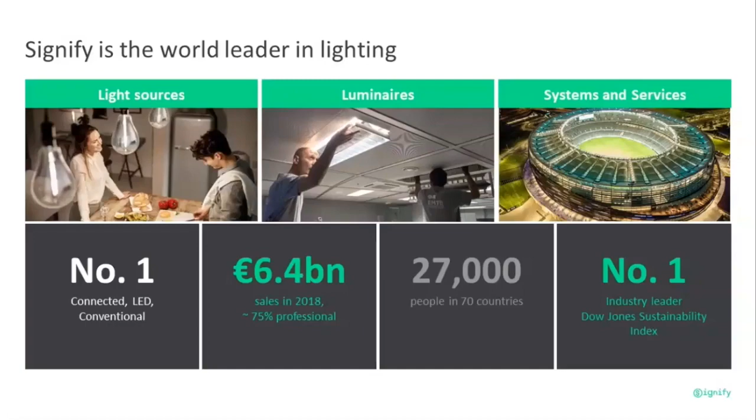Color Kinetics for architectural lighting, used in lighting many of the world's landmarks, for example, the Empire State Building, Bay Bridge, London Eye, 15 London bridges in the Illuminated River project, Gateway of India, and the pyramids. Vari-Lite and Strand entertainment lighting. These products are used in theatres and by artists big and small, including Iron Maiden, AC/DC, and Kiss, to name but a few.

So now let's look at our optical portfolio, Legend Optimise, or Legend O as we like to call it. Legend O was developed and launched back in 2017, but has continued to grow and been adapted based on our customer needs. It provides a complete range of optics covering all public lighting applications, outstanding and flexible performance, LED optic engines, a future-proof distribution, standard and customised flux and optics solutions.

So Legend O offers a unique combination of standardisation and customisation. It provides a standard LED engine available across a multitude of luminaires and allows us to provide tailor-made solutions to meet the customer needs. Legend O offers complete optics, so a range fit for any application. It's flexible, allowing standardization over applications with outstanding performance across a wide range of geometries, as well as design parameters, for example, tilt and overhang.

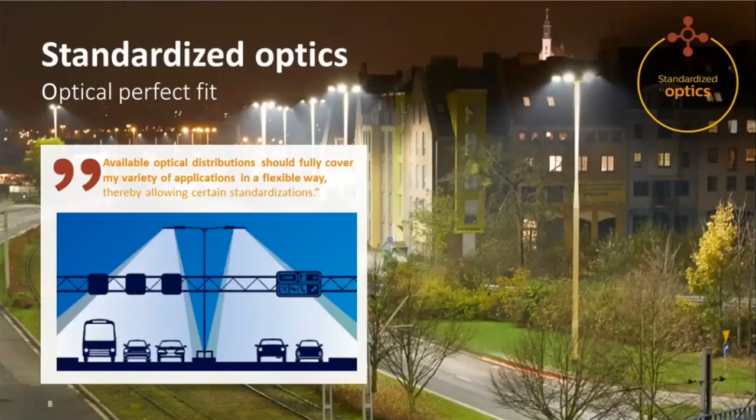So let's look at some of the optical distributions available in the portfolio. Legend O offers a variety of lighting distributions to fit different lighting configurations, depending on the application, the user, the lighting criteria, so the level of comfort, maybe the glare classification and TI, the geometry of the area to be lit, and the beam width.

Within this wide optical portfolio, there is a compact optic selection available. So if the preference is to limit the variety, i.e. to simplify asset management and operations or maintenance, then we use the compact optical portfolio. If you have a look at the blue ones, designed with luminance in mind, so our M classifications, and the green colour with illuminance in mind, so for our P classifications or C classifications.

Distributions are designed for major and minor roads, for small to large streets, for motorised or mixed traffic, pedestrian streets and paths, parking, squares, parks and roundabouts. They can provide high spacings and minimum energy consumption for renovated or new lighting designs. They can be used in various overhangs and luminaire tilt angle positions.

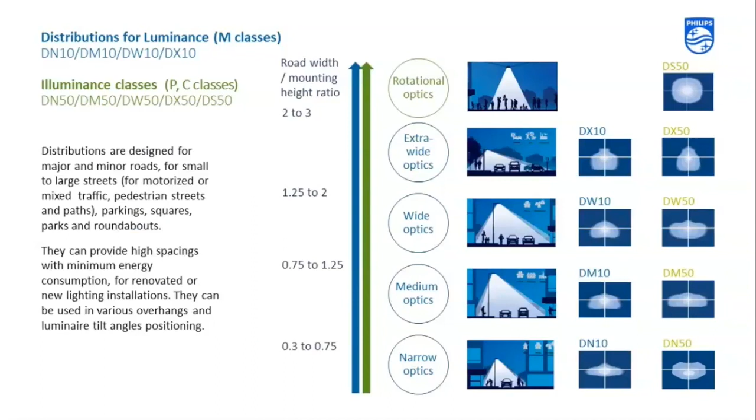With this diverse optical portfolio, Legend O opens up the option to optimize the lighting solution according to well-defined and/or project-specific criteria regarding quality, local lighting requirements, matching specific application needs, thereby often improving energy profiles. So these include the full range of Legend O. In the UK, we offer all of these optics in our portfolio and they are already in lighting reality.

Again, the blue ones are designed with luminance in mind, so these are for our M class and our traffic routes. And the green colour is with illuminance in mind, so these are for our P and C classes. This additional flexibility really provides the designer with the option to pick the most energy efficient optic for the exact road geometry and application. Sometimes there's a need for more specific optics, including things like wet roads or a higher level of comfort, so a higher G class, with optics available from G1 to G6.

Facial recognition, light trespass prevention, so internal louvers with photometric data, catenary implantation, night preservation, protecting the night sky, and biodiversity preservation, protecting our wildlife. In the UK, we probably look at the comfort versions and backlight versions the most. So it's important to note that the higher the G class in general, you get a reduction in spacing and increase in energy consumption due to the level of comfort of the distribution.

So if you're comparing luminaires with no G rating to a luminaire with a G3 rating, for example, then although the comfort level for the user will be better, the energy consumption may increase. So it's important to remember the driver here and specify if a glare classification is required.

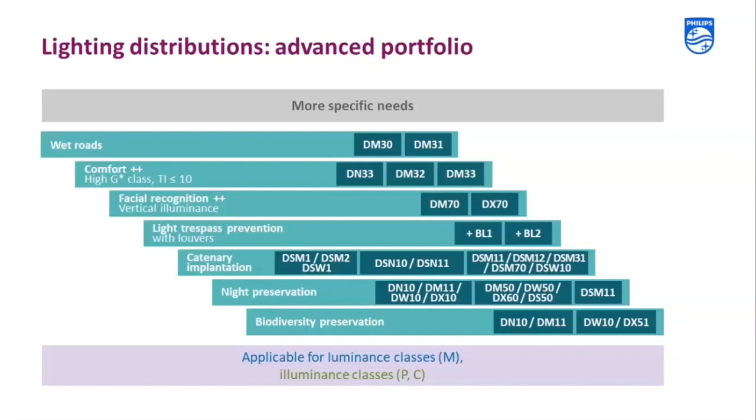We also have some other dedicated areas. So for example, we have a symmetrical optic. This is the DS50. This produces a symmetrical pattern of light in a road lantern. It's good for things like heads of cul-de-sacs, car park areas, squares and parks. We have specific pedestrian crossing optics. So these are dedicated to light pedestrian crossings and give the positive contrast required.

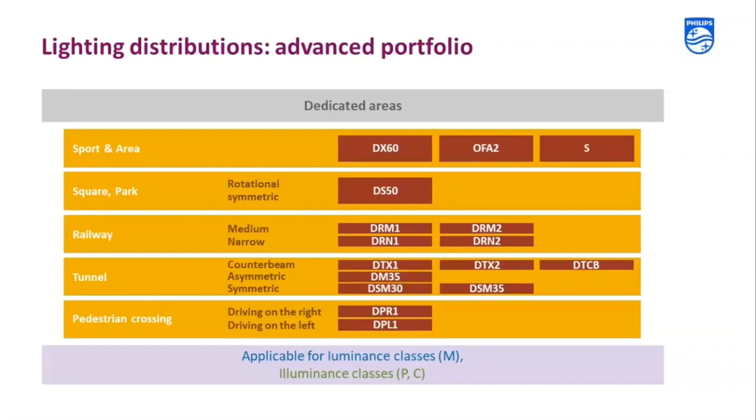I'll just mention the railway optics. So these have been designed for platforms, but they're very efficient on footpaths at around 30 to 35 metre spacings. So we have optical distributions that have been designed for luminance classes, so for our M classes. So there's some examples on the slide here. So we have things from extra wide, so a DX is an extra wide optic, a DW is a wide optic, DM is your medium optics, DN is your narrow, and we also have some extra narrow optics.

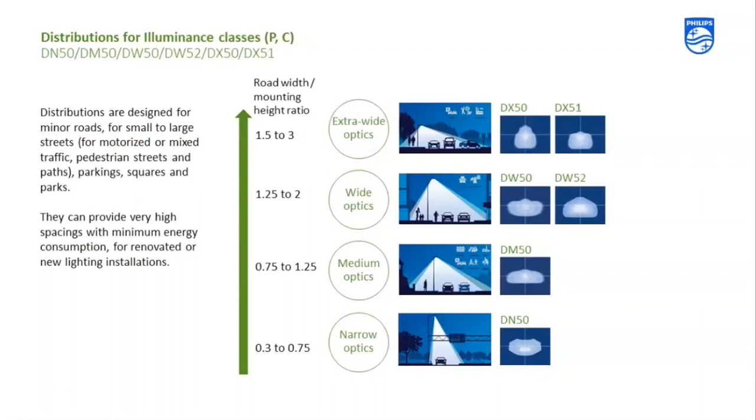And we have the same for our illuminance classes. So for our P and C classes, again, we have extra wide optics down to narrow optics as seen on the slide. So these optical distributions have been designed for specific needs. So wet roads we don't really use in the UK, but we have a wet road optic if required. Comfort, so the DN33, DM32 and DM33 give a higher G rating, so G4 or G6, for motorway applications, for example. The DM70 and the DX70 are designed for facial recognition.

You need to be a bit careful with these. If you don't want facial recognition, if it's not part of your design, then they're a really good optic for many applications, but the energy efficiency is poor. So they'll cover a lot of applications, but they'll use a lot more lumen to do so.

Light trespass prevention, so these provide us with internal louvers with photometric data, so you can model the impact. So we have BL1, which is a limited cutoff, and BL2, which is a very sharp cutoff at the back. However, we can also provide external louvers for most luminaires for customers who wish to see a louver fitted.

Here are some more distributions for dedicated areas. So again, the most popular are the symmetrical optic, so the DS50, and also, as we mentioned, the railway ones are sometimes very good on footpaths. And then we have our pedestrian crossing optic, so we have the right hand side and the left hand side, and we also have specific optics for tunnels and subways.

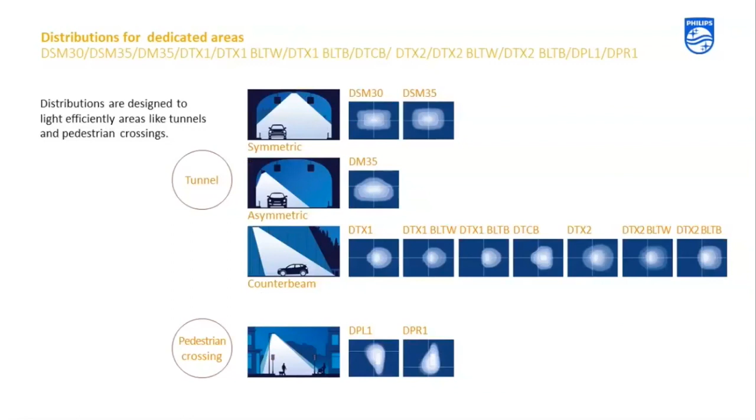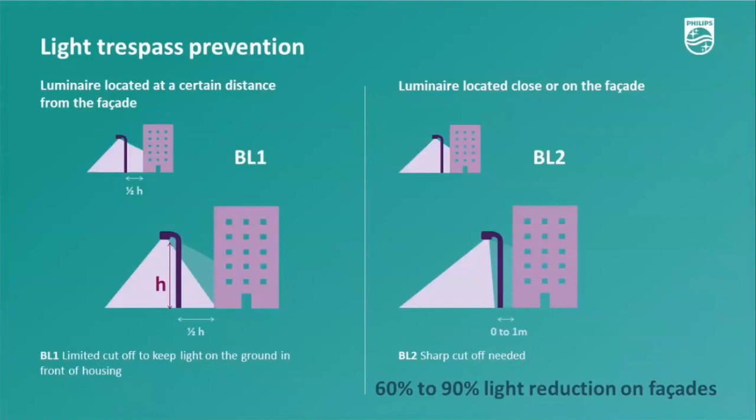So we mentioned light trespass prevention, and we're looking at the optical distributions. So they provide greatly reduced light trespass. It's an internal louver that fits into the luminaire. It can be used for retrofit solutions. We have photometry for the calculation, and it also preserves the aesthetic of the luminaire because you can't see it from the outside. And we have a BL1, so that's a limited cutoff, and we have a BL2, which is a sharp cutoff. And using the internal louvers can give a 60 to 90% light reduction on the facade.

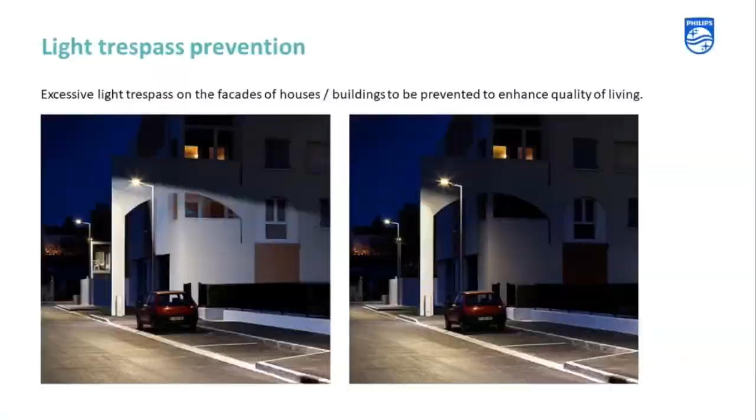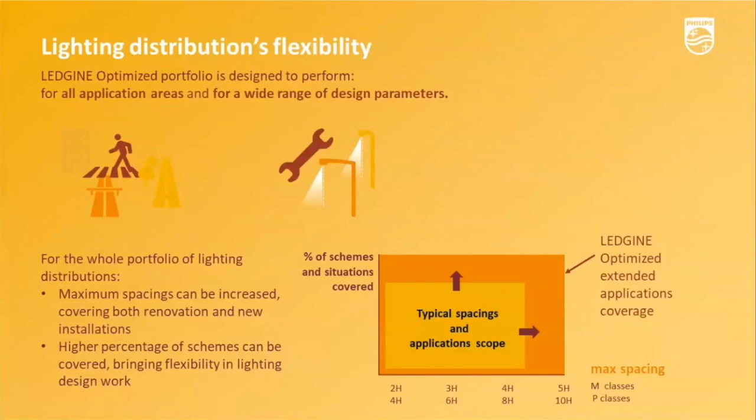So the beauty of LEDGINE Optimized is now it's in the full range of products. So you can use the same optical distribution in a road and street luminaire or an architectural fitting or a floodlight, giving you flexibility to use the correct lighting distribution and product for the application. It also allows the LED to be upgraded easily using the same optical portfolio to keep up with LED advancements.

So we've covered the optical portfolio. It's important now to know how this data is presented. So now we're going to look at the difference between absolute and relative photometry.

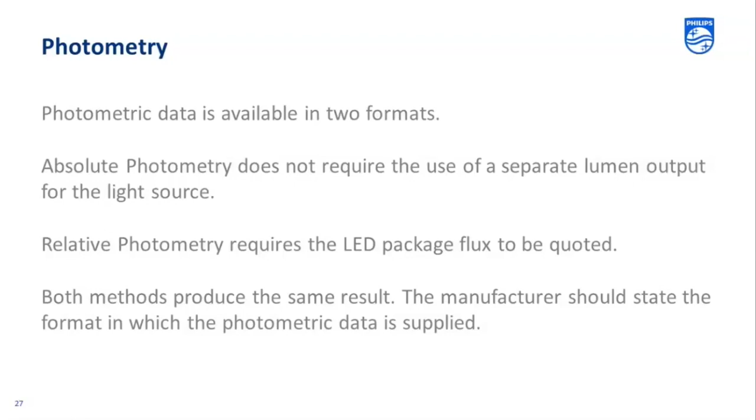So photometric data is available in two formats. We have absolute photometry, which does not require the use of separate lumen output for the light source, and relative photometry, which requires the LED package flux to be quoted. Both methods produce the same result. The manufacturer should state the format in which the photometric data is supplied.

So absolute photometry for the LED luminaires should be conducted according to the IES LM-79-08, photometric measurements of solid state lighting products. This is an American standard.

Relative photometry should be conducted in accordance to EN 13032-1:2004, light and lighting, measurement and presentation of photometric data of lamps and luminaires. Part 1, measurement and file format. So this is following the European standard, which, as the UK, we would normally work to.

The difference between the two types of photometric data is the LOR, or the light output ratio. This is the percentage of light emitted from the light source that makes it out of the luminaire. So traditionally with HID lamp sources, you would measure the flux directly from the lamp itself, and then we measure the flux from the lamp inside the luminaire.

And the difference between these two values was expressed as a percentage and was the LOR, or the light output ratio of the luminaire. So typically in HID luminaires, the LOR would be around 0.8 or 80%, meaning 20% of the lamp flux was lost inside the luminaire. It's no different for LEDs.

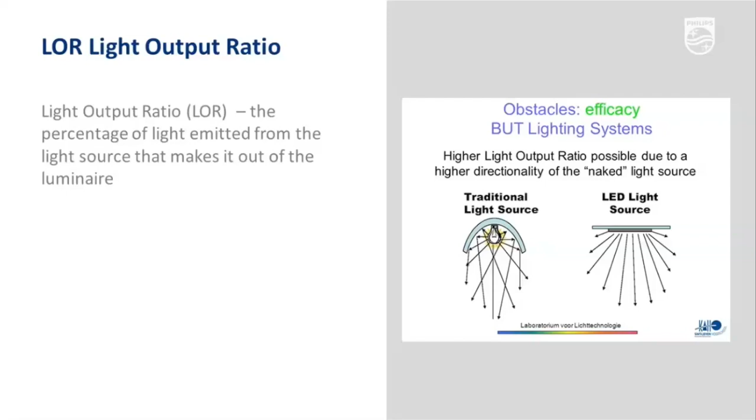So when we calculate the LOR, we talk about the following. So we talk about the source output. This is the luminous flux emitted from the light source only, measured in free air. So we're talking about the flux coming from the lamp or the LED board. The luminaire output is the luminous flux emitted from the luminaire, taking into account any thermal and optical losses.

So the LOR is calculated as follows. The light output ratio is the luminaire output divided by the source output. And if you want to work out our luminaire output, it's the source output multiplied by the LOR.

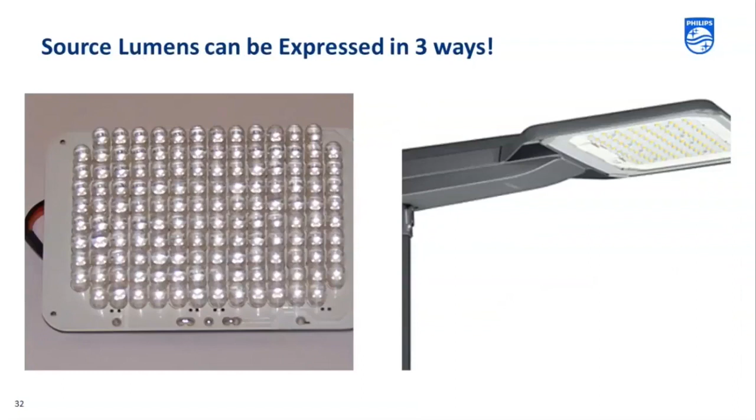So source lumens can be expressed in three different ways. So we have cold source flux. This is the flux emitted from the LED board when the junction temperature is not at the recommended level. So it's done in flash test circumstances in the first 10 milliseconds of the board being powered.

So if you measure only the cold flux, then the LOR has to include both the thermal losses from the luminaire once the board is running at the junction temperature it will be at inside the luminaire, and the optical losses from the lenses and the diffusers. So when you use relative photometry with cold source flux, the LOR includes both the thermal and optical losses.

Hot source flux. So this is the flux emitted from the LED board when the junction temperature is at the temperature it will be within the luminaire. So if we measure hot flux, then the LOR includes only the optical losses from the lenses and the diffusers. So when you use relative photometry with hot source flux, the LOR only includes optical losses. So you would expect the LOR percentage for hot source flux to be higher than that of cold source flux.

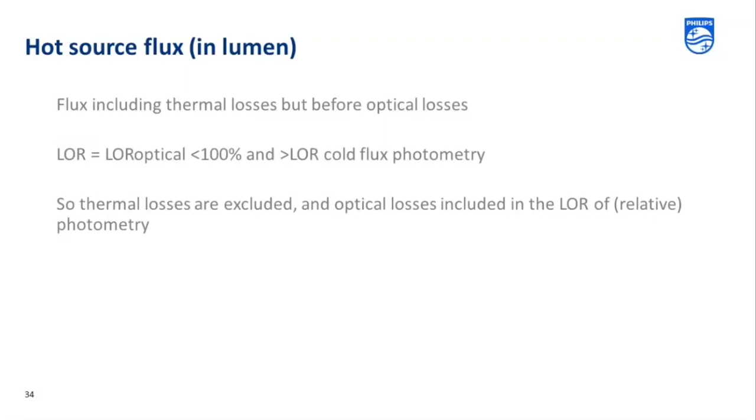Absolute source flux. So this is where the flux measured is the flux out of the luminaire. So it includes all the thermal and optical losses. So absolute source flux will have an LOR of 1. So LOR in absolute photometry is without any thermal or optical losses, and these are already included in the flux.

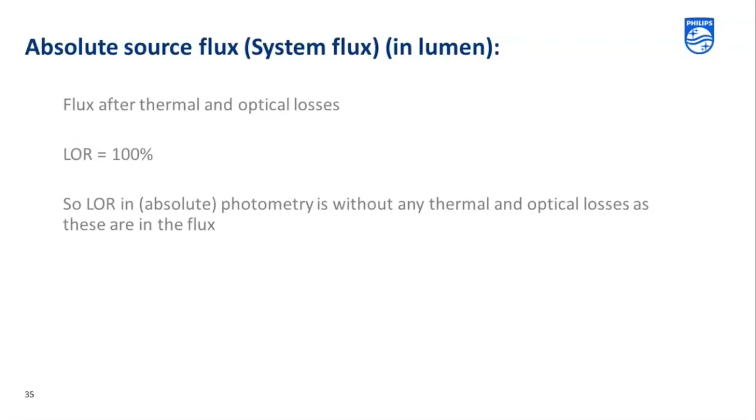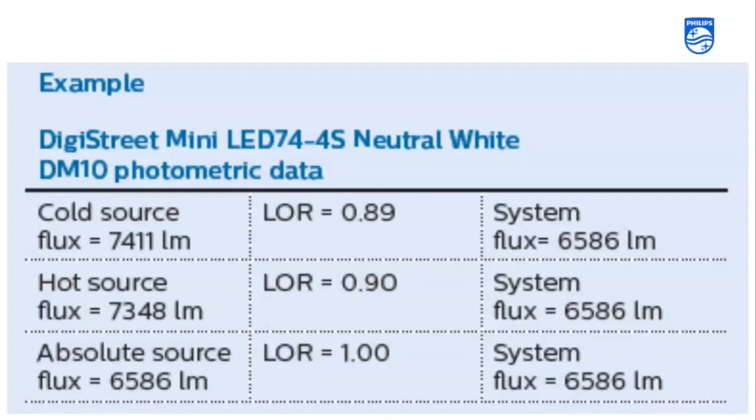This is what you calculate with when you use the photometric file, whether it be an LDT file or an IES file or another format. The LOR is built into the file. So although the flux of the file will show the source flux, the calculation is done using the system's flux. In this case, you could do 3 different calculations, each with a different flux type, and get the same result.

So absolute photometry measures very precisely the lumens emitted by a specific luminaire. Luminaires that have been measured using absolute photometry can be identified as having an LOR of 1 or 100%. These lumens are often referred to as system flux, as these are the lumens emitted from the complete system, including thermal and optical losses. The limitation of absolute photometry is that it's only applicable to the exact luminaire or light source combination tested.

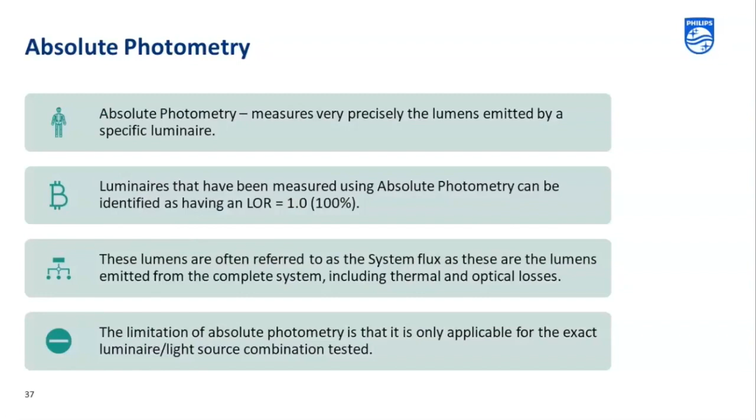Relative photometry can be adjusted to measure light distributions by various lamps with different lumen outputs. Luminaires that have been measured using relative photometry can be identified as having an LOR of less than 1. These lumens are often referred to as source flux, as these are the lumens emitted from the LED measured in free air without any thermal or optical losses applied. The advantage of relative photometry is that you can measure the source, and based on the fact that you have known losses, you can apply an LOR to many different variants of the same luminaire.

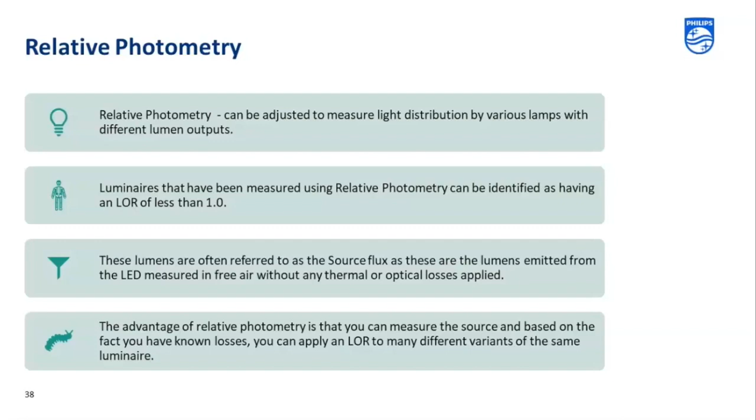To date, there is no standard that states for LED one type of photometric testing should be done over the other. If relative photometry is used, it will always state the source flux and then apply the relevant LOR for the exact luminaire configuration. The LOR is automatically integrated within the photometric file and is therefore automatically accounted for when using the file to perform a lighting calculation.

So let's look at an example. Here we have a 20 LED luminaire with 17 different optics. Each optic has the same source flux of 4,900 lumens, but they all have a different LOR. This is what you would expect, as every distribution will have slightly different losses. So you can see if we apply the LOR, then the system flux is different for every optic.

Sorry, I was just trying to get the pointer there.

So for example, here we have the same source flux for all of these 17 optics. We have different LORs, including optical and thermal losses. And we have the system flux here, which is all different because the system flux is the source flux multiplied by the LOR.

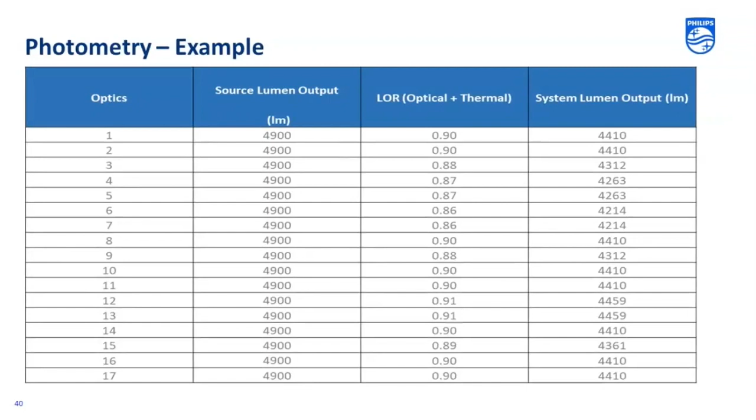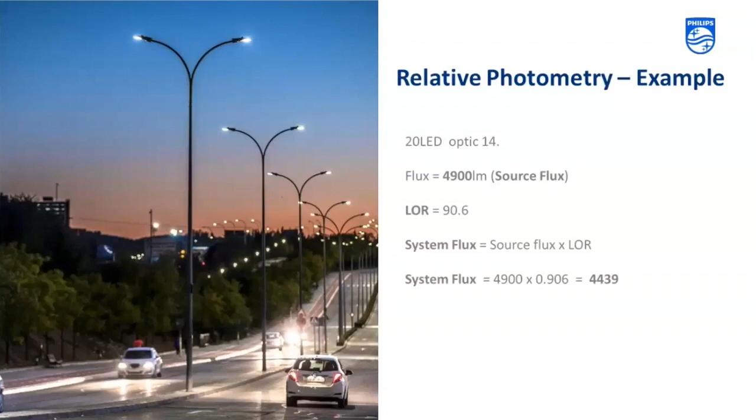So if we use relative PM data for a 20 LED luminaire and we use optic 14, the photometric file will have a flux of 4,900 lumens, which is the source flux. The LOR of 90.6 is applied within the photometric file, and the system flux that is used in your lighting calculation is 4,439 lumens. This is all done in the photometric data file, so the IES or LDT file. You don't have to account for this.

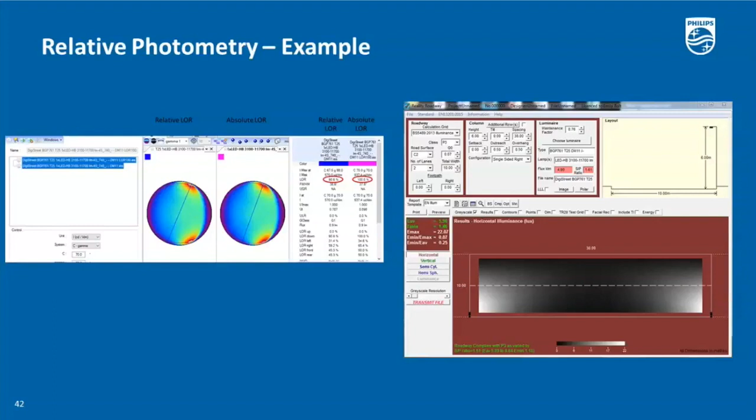Here you can see that the LOR for relative PM data is 90.6. So here, the photometric file is used in the calculation in Lighting Reality. It gives you the following results. So we need 4.9 kilolumens here, and it gives us an Eav of 5.96 here and an Emin of 1.46 here.

So if we look at absolute photometry and we take the same example for optic 14, the photometric file will have a flux of 4,439, which is the system flux. The LOR is 1, as this is absolute photometry. Therefore, the source flux and the system flux are the same.

Here you can see that in the case for absolute photometry, the LOR is 1, and this is used in the calculation in Lighting Reality, and it gives the following results. So this flux now, the system flux, is 4.439 kilolumens, and we've got an Eav of 5.96 and an Emin of 1.46, which is exactly the same.

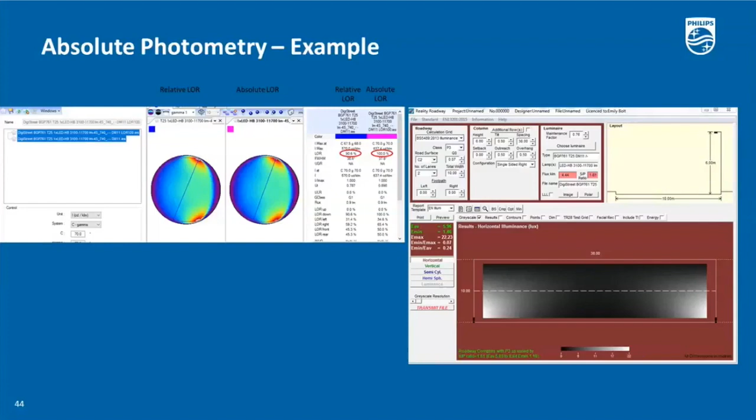It's also important to understand what type of photometry you are using when you calculate the efficacy of a source or luminaire. So luminous efficacy is a measure of how well a light source produces visible light. It is the ratio of luminous flux to power, measured in lumens per watt in the International System of Units. So the source efficacy, or lumens per watt, is equal to the source lumens divided by the circuit watts. Source lumens are the lumens from the lamp or LED module.

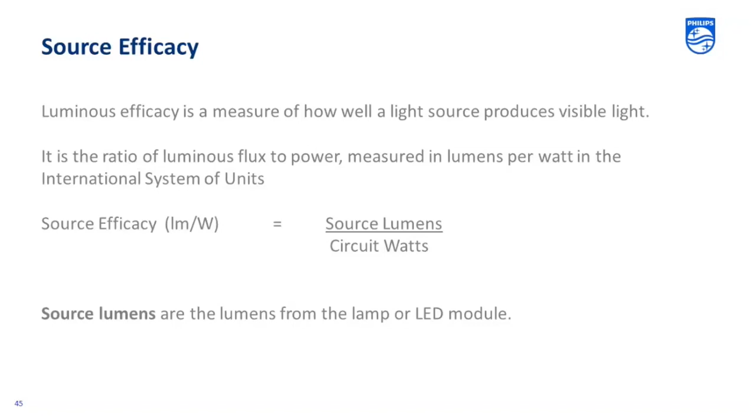Luminaire efficacy is a term normally used to describe the performance of a lighting system where the input and the output values differ. The efficacy of a light source is given by the luminous flux it emits divided by the power consumed and is expressed in lumens per watt.

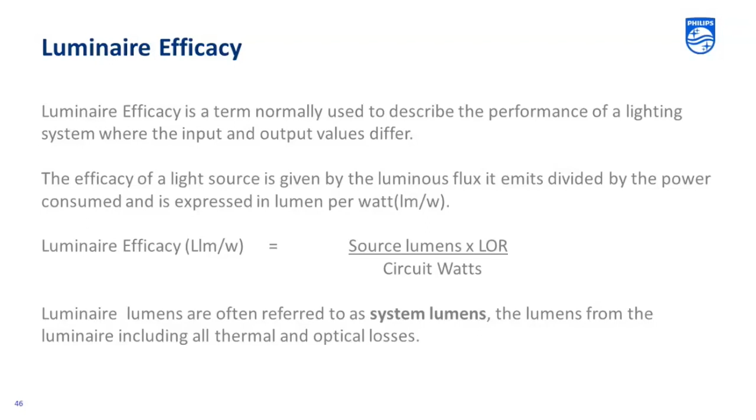Lumens, so we have luminaire efficacy is equal to the source lumens times the LOR divided by the circuit watts for luminaire efficacy. Luminaire lumens are often referred to as system lumens, the lumens from the luminaire including all thermal and optical losses.

If we calculate the luminaire efficacy, we have to use the source flux, 4,900 lumens, multiplied by the LOR of 0.9. So this gives us 4,436 lumens. We then divide this by the luminaire wattage, which is 33 watts, which gives us a system efficacy or luminaire efficacy of 134 lumens per watt.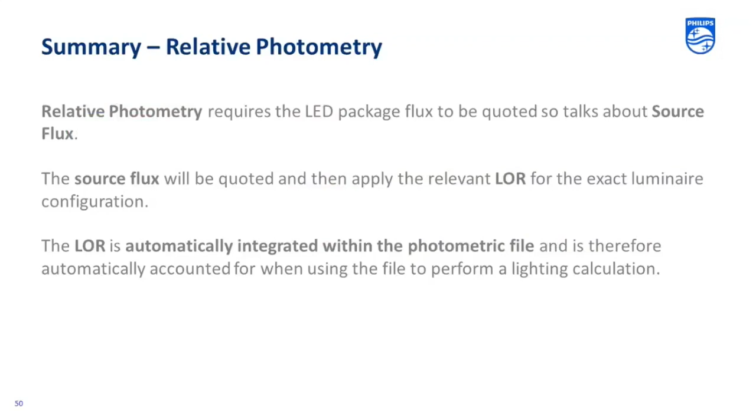So to summarize, we have relative photometry. It requires the LED package flux to be quoted, so talks about source flux. The source flux will be quoted and then you apply the relevant LOR for the exact luminaire configuration. The LOR is automatically integrated within the photometric file and is therefore automatically accounted for when you use the file to perform a lighting calculation.

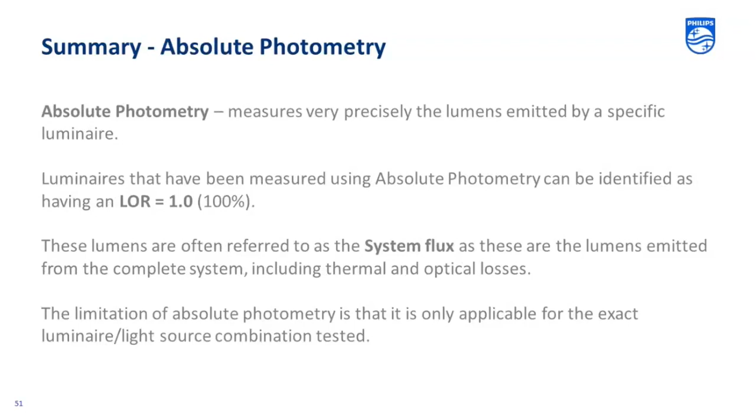Absolute photometry measures very precisely the lumens emitted by a specific luminaire. Luminaires that have been measured using absolute photometry can be identified as having an LOR of 1 or 100%. These lumens are often referred to as systems flux, as these are the lumens emitted from the complete system, including thermal and optical losses. The limitation of absolute photometry is that it is only applicable for the exact luminaire light source combination tested.

There are two ways in which LED luminaires can produce photometry. There's no standard that states for an LED one type of photometric testing has to be used over the other. Both methods produce the same result, and the manufacturer should state the format in which the photometric data is supplied.

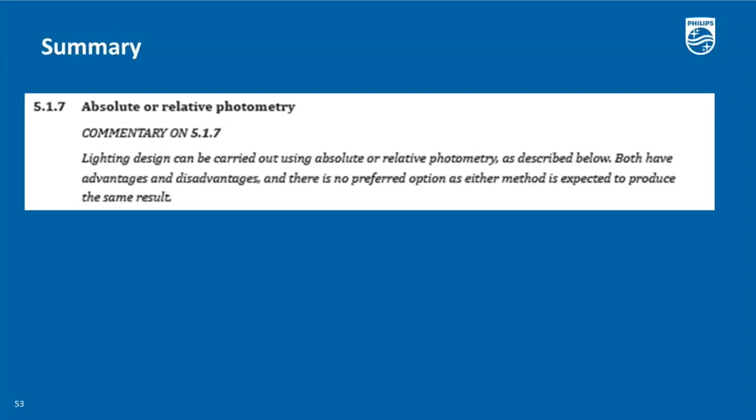So as we've discussed, this extract has been taken from the brand new version of BS 5489-1:2020, and it says lighting design can be carried out using absolute or relative photometry as described below. Both have advantages and disadvantages, and there is no preferred option as either method is expected to produce the same result. Whether you are using absolute or relative photometry, it does not change the lighting performance of the design. The results are absolutely the same.

So the next topic covers the update on how we calculate maintenance factor, and it gives a little update on lumen maintenance figures. So in 2019, the CIE released a new document, the ISO/CIE TS 22012 Light and Lighting – Maintenance Factor Determination – Way of Working. This was followed in 2020 by the ILP Guidance Note 11/20 Maintenance Factor Determination and its impacts on the performance and overall efficiency of LED luminaires. So we're going to have a quick look at what these documents mean in terms of calculating the maintenance factor in your lighting calculation.

So this formula may look familiar to you all. It's how many of us have calculated the maintenance factor for our lighting designs. We've used this formula for our HID luminaires, and we have continued as an industry to adopt this for our LED luminaires. And it was taken from BS 5489-1:2003.

This is a new formula for calculating maintenance factors in our lighting design. It looks very similar. It's taken from the Lumen maintenance ISO CIE TS 22012 document and the ILP guidance note 11.

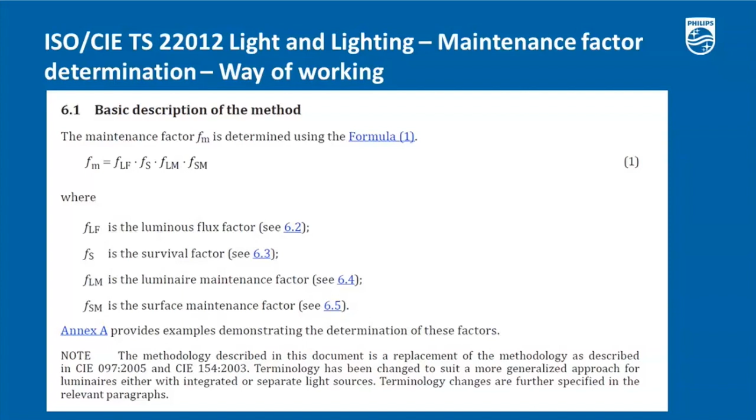So our FLF is the luminous flux factor. It expresses the depreciation of the luminous flux over time due to aging of the light source or luminaire during regular operation. This excludes external factors. This is defined as the ratio of depreciated luminous flux to the initial luminous flux. So our FLF is what used to be our lamp lumen maintenance factor, so our LLMF.

So for an HID lamp, this was generally when the lamp hit 80% of its lumen output, and it would be replaced every 3 years, for example. 80% was used as this was the level at the time that it was thought that the reduction of light would be noticeable. With LED, this time frame's changed from 3 years to 50,000 hours and now 100,000 hours. And we started with L70 for some LEDs, and then we went to L80, and for a few years now we've achieved L90. Recently, data has shown that in some cases, L96 to L98 can be achieved.

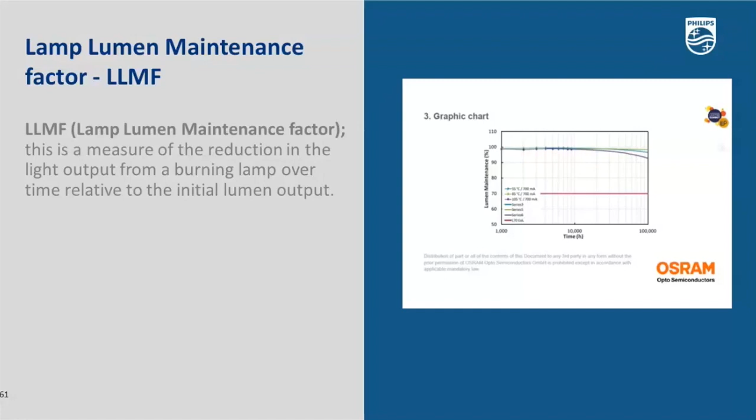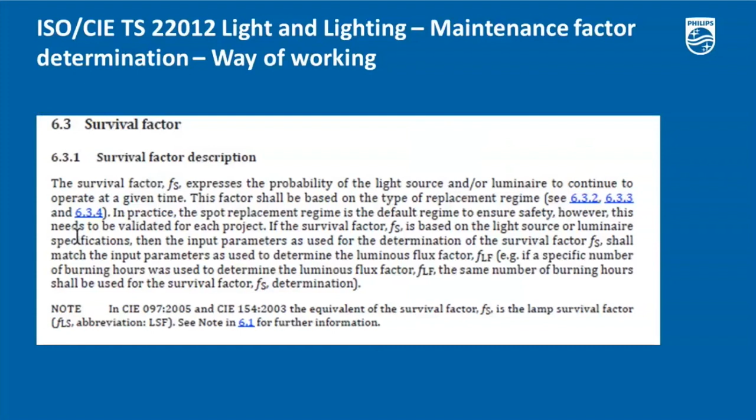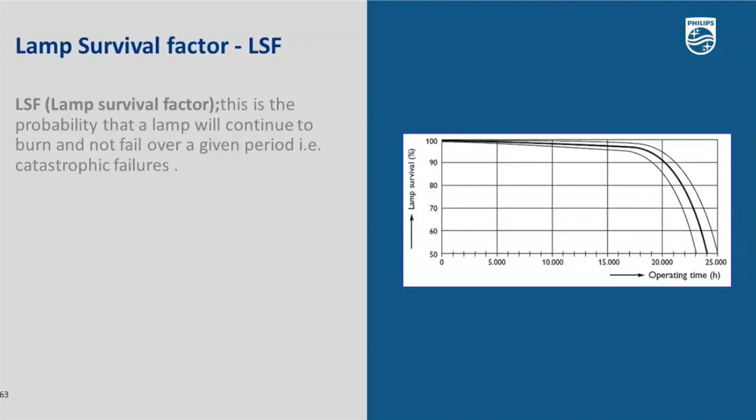So our FS is the survival factor. So this expresses the probability of the light source and or luminaire to continue to operate in a given time. So this is the same as our LSF, so our lamp survival factor. Throughout the industry, we've always assumed a value of 1 for the LSF due to the fact that once the lamp has failed, a spot replacement will take place and the lamp will be replaced. This hasn't changed, as the new standard states.

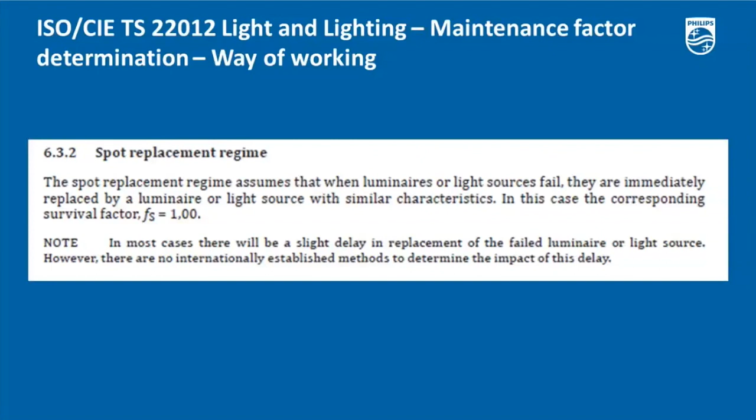The spot replacement regime assumes that when a luminaire or light source fail, they are immediately replaced by a luminaire or light source with similar characteristics. In this case, the corresponding survival factor FS is 1. So we use this in our maintenance factor calculation as if the luminaire produced no light, it would be replaced.

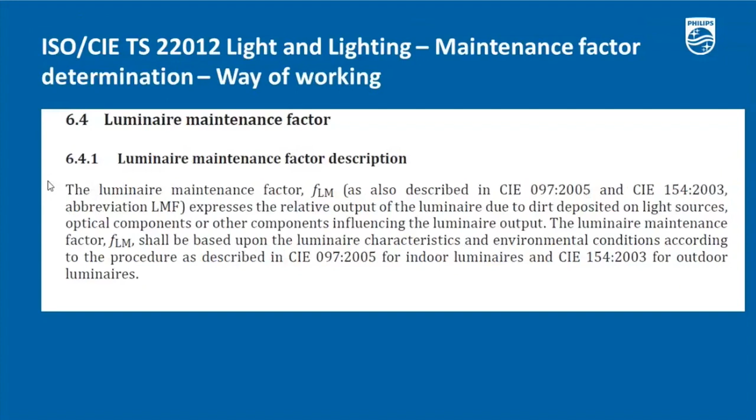FLM is the luminaire maintenance factor. It expresses the relative output of the luminaire due to dirt deposited on the light sources, optical components, or other components influencing the luminaire output. This is the same as the old LMF, which we take from the British Standard and base it on the environmental zone and the mounting height and the time between cleaning. So we use table C1 in BS 5489-1:2020.

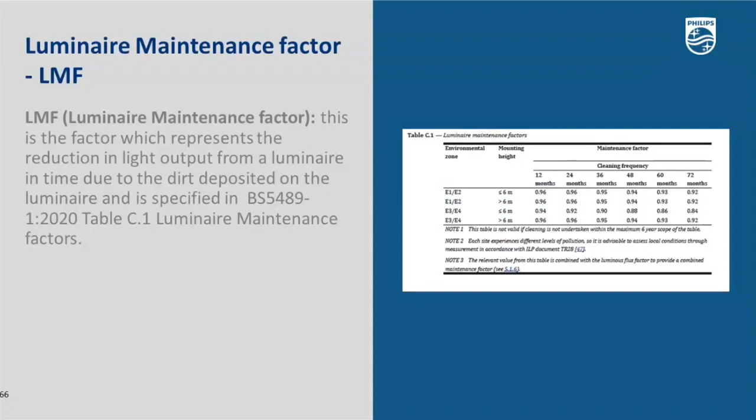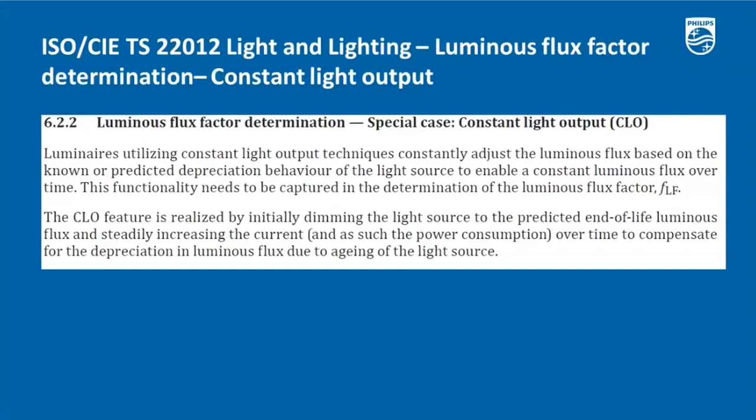Constant light output. So when we talk about constant light output or CLO, this was adopted by the industry as an energy saving technique. It initially dims the light source to the predicted end of life luminous flux and steadily increases the current over time to compensate for the depreciation in luminous flux due to the aging of the light source. The new standard looks at 2 different ways of representing CLO in the maintenance factor calculation.

So method 1 is generally how we do it now. You carry out your lighting calculation using the photometric data provided by the manufacturer and using a maintenance factor as though no CLO is to be applied. So you design it with an FLF based on the lumen depreciation of the lantern. So for L90 at 100,000 hours, your FLF would be 0.9 and you use this in your maintenance factor calculation. Most manufacturers now give CLO as standard, so they then take the flux that you've designed with and they apply the CLO at the point of order.

The other way to do it would be to use the FLF of 1. Therefore, the luminaire doesn't depreciate as the CLO function maintains the required luminous flux. If you opt to do it this way, please inform the manufacturer at point of order, as in some cases you could end up with a CLO being double counted.

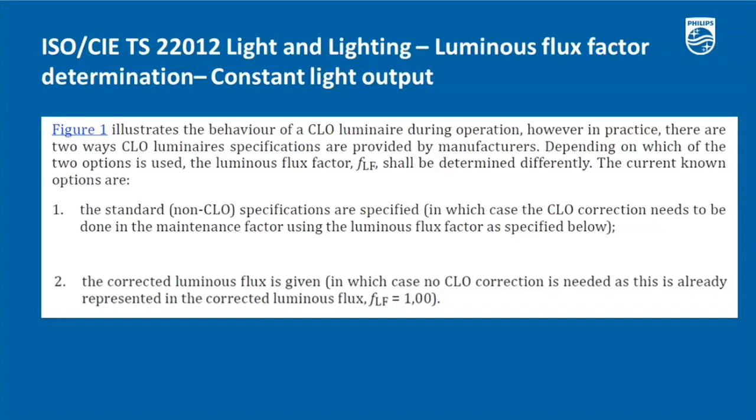So as we said, the preferred method is to use the correct lumen depreciation in your maintenance factor calculation based on the L90 figure. So if in your Lighting Reality calculation you needed 3,900 lumens for a non-CLO, these are the end-of-life lumens taking into account a lumen depreciation of 10%. Then the manufacturer provides you with a CLO lantern and they calculate the CLO lumens based on the lifetime. So you can see here that 3,900 is what we need in our lighting design, but the CLO value is 3,500 because we've taken the 10% off, we've corrected it for the L90 figure. And this is done at point of order.

So what has changed? Very little. The abbreviations have changed, but the definitions have stayed very much the same. And if we plug the figures into the new formula, so for a 6-year clean based on an E3, E4, the values we use in our lighting calculations have remained the same. So this is for a 6 metre or below column, and this is for anything above 6 metres.

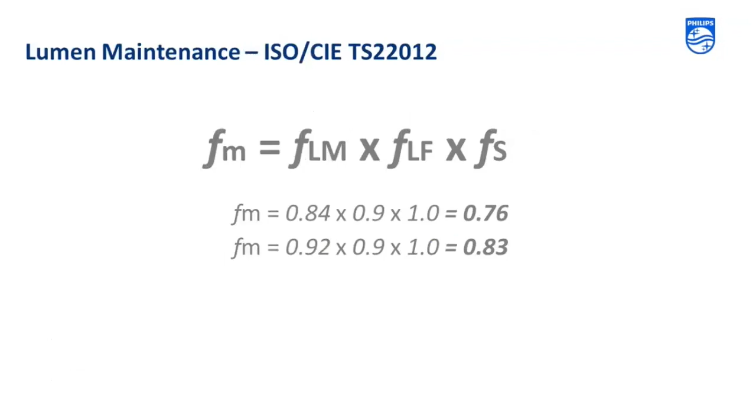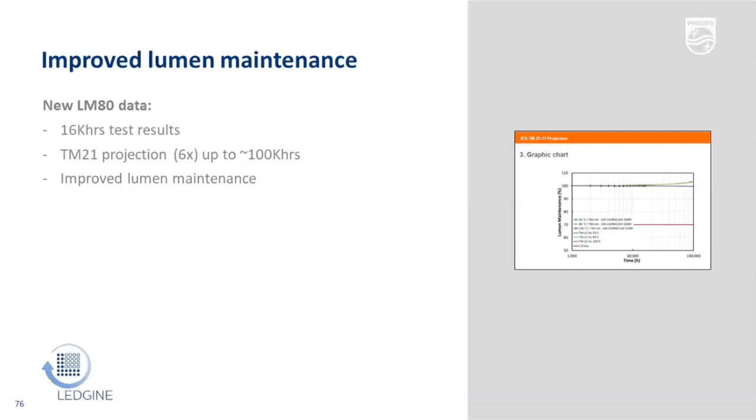So recently we've been looking at our lumen maintenance, or our FLF, lamp lumen maintenance factor, to see if we can improve this from L90 for our LEDGINE portfolio. In 2020, new data was supplied by the LED chip manufacturers that has allowed the revision of lumen maintenance in our luminaires. For the last 5 years, we've given L90 as the lumen maintenance, and this was the worst case. So it meant no matter whichever combination of luminaire size, LED number, or drive current, all our lanterns achieved L90 as a minimum. The new data suggests that in some cases, this may now be increased up to L96 or L98. We have seen this in the market with some of our competitors now claiming much higher LXX values.

So when we talk about the FLF of L90, as we said, this was the worst case, and many luminaires would achieve higher than this, for example, L95. When doing a lighting design, to really optimize the solution, we could provide a different LXX value for every combination. So we could say this combination is L90, this is L91, this is L92, this is L95. But this would not be practical, as every time you did an optimization in Lighting Reality, you'd have to change the maintenance factor in your lighting calculation.

You have to also remember that the CLO function is based on the FLF. So the LXX value, the luminaire wattage, is calculated based on the average over life. So as the LXX value increases, then in theory you could see a slight increase in the luminaire wattage, as the average for an L90 product is in a different place to the average of an L98 product. In L98, the impact of CLO is minimal, as the start and end wattage would only be 2% difference, and in a 20-watt lantern this is minimal.

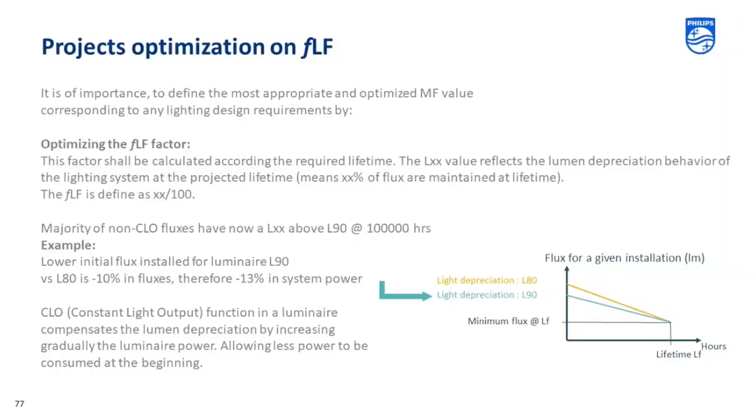Let's look at an example. So here we've done a calculation based on an L90 product, giving us an overall maintenance factor of 0.83. So the required flux for that calculation to comply is 3.89 kilolumens. If we plug this into our software, it tells us that the CLO wattage is 22.33 watts, and the CLO lumens are 3,500 lumens. It also tells us this lantern is actually capable of L97 at 100,000 hours.

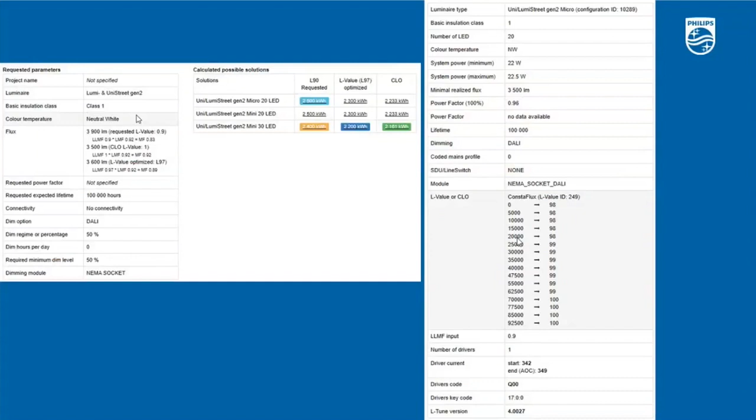Therefore, although in the background our software is using the improved lumen maintenance to calculate the CLO, we're advising that the LXX value you continue to use for our road and street luminaires will be L90 at 100,000 hours. This will be your FLF used in your maintenance factor calculation of 0.9.